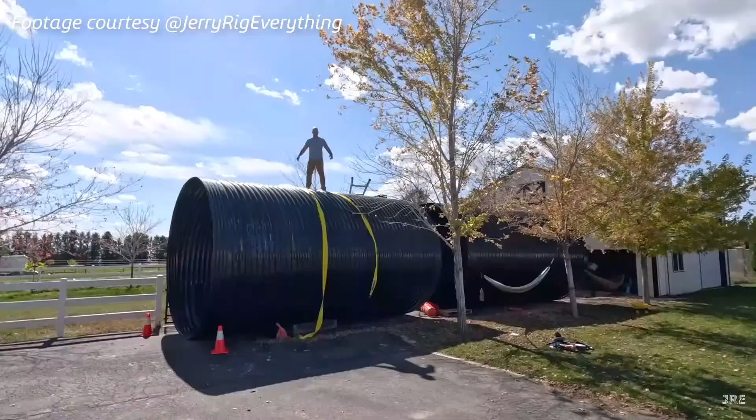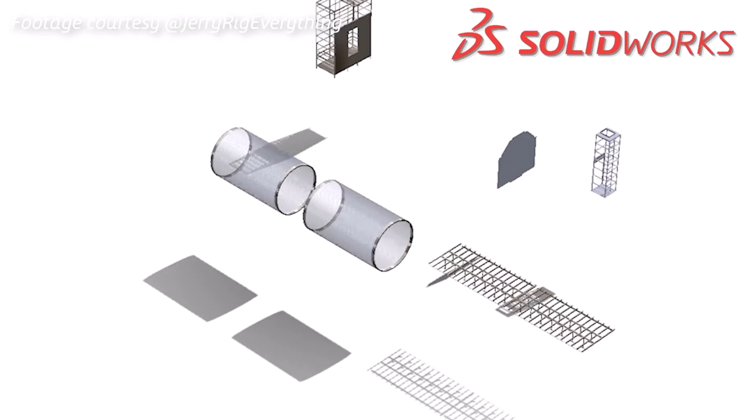I don't know if you've seen this video, Jesse. I've only seen bits and pieces of it. So this is not a single video. What you're seeing right now is Zach built an underground bunker, or at least he designed it using the Maker edition of SOLIDWORKS. If you've never seen it before, this is tubing underground, a very large set of tubing he puts underground. Apparently he said, and I'll trust his word for it, I don't know about you guys, so let us know in the chat if you've built an underground bunker.

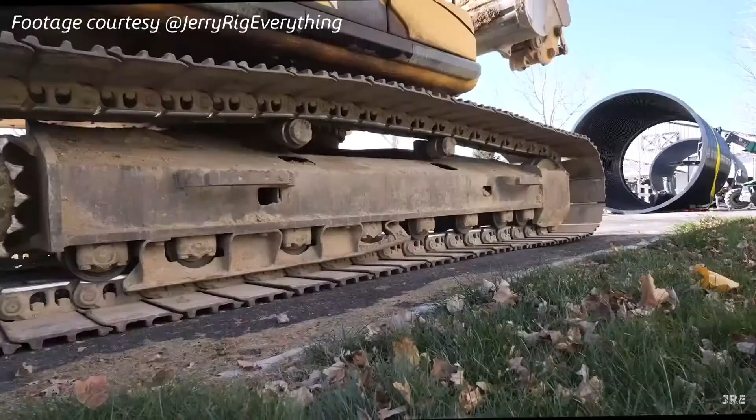Apparently, if you get 6 feet or more underground, at least where he lives, maybe below the frost line, the temperature stays around 60 degrees. So it's kind of a persistent year-round temperature. He wanted to get far enough underground for it to actually be inhabitable.

That was the first video. It's kind of crazy. There's going to be an enhancement you guys will see later where we show large displacements and how we handle those in SOLIDWORKS as of FD01. That's definitely an assembly that would apply to.

Yeah, that is an ambitious project. But it's crazy, you guys saw the explode and then it comes back together, right? Explode, collapse. It wasn't that many parts, probably 8 parts that came back together. Of course, 2 of those parts are very large.

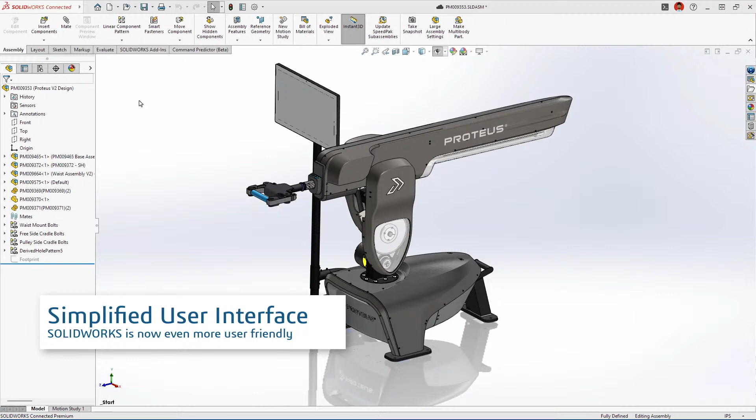This first one here is simplified user interface. What were your first thoughts when you saw this as a longtime SOLIDWORKS user? Well, at first, obviously we're really good at customizing the software, so I was like, okay, I don't really know that I see the benefit. But then when I thought about it, it makes a lot of sense.

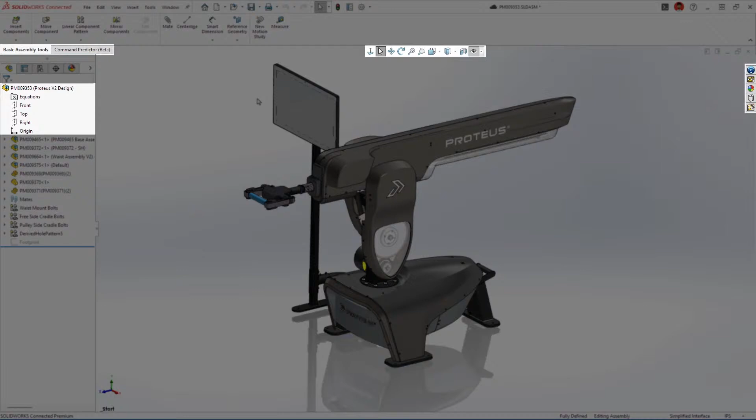I think it's one of those things where you're going to have to rely on experienced people to let younger people know about it, because they may not know. If you're brand new to it, you may not even know that it's there. Having an experienced colleague tell you about it could really help out. I think it's a cool idea.

It is neat. The first time I looked at it, I'll be honest, I usually use the S key for pretty much everything. A lot of us who work at SOLIDWORKS, a lot of you out there who've used it for years - I've taught so many training courses on SOLIDWORKS, not trying to brag - you know it's like you just press the S key.

As long as you know the term you're looking for, just start typing and you have it. Your hands are always near the keyboard. But for a lot of new users, that's really not a thing - you don't know the names of the commands if you're using a new program. To be fair, not a lot of software has search functionality like that, where you can search for functions and initiate the tool right there.

That's kind of a unique thing that we have, and I do love to work that way. But simplified interface is really cool. Coming into a CAD software, it's really easy to get totally overwhelmed if it's your first time. SOLIDWORKS is really good about interface stuff in general - it's one of the things I love most. Giving somebody a clean start, just the basics you'll need, gets them excited.

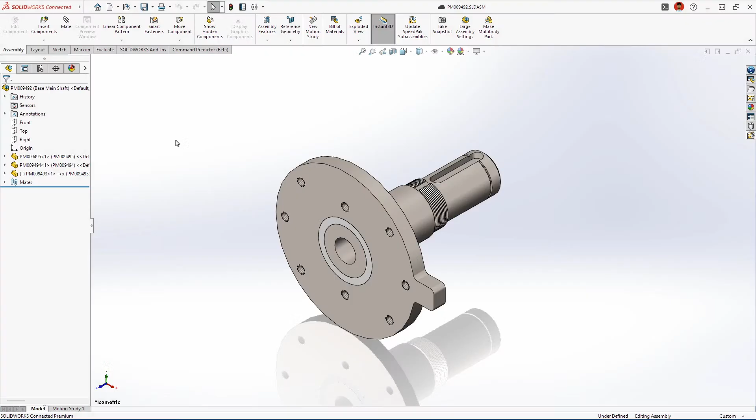All right, so let's move on to the next one here. So what do we got? Ooh, automatic drawing generation. What do you think? I think this is a crazy idea, and I can't believe that it actually works.

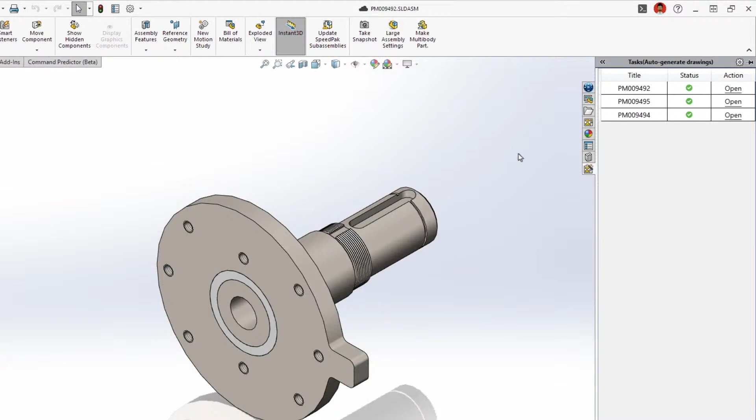Yeah, I think one thing that came to mind with this—we were talking to one of our teammates, Mike Sandy, at World, I remember, because we showcased this at World. And one thing I remember talking with people about in the corridor is that you can see it kind of makes a standard three-view drawing. You can see there's projected views and everything. Kind of reminds me of predefined views in a way.

Yeah, if you guys don't know, if you save a drawing with predefined views, you can load the model in, and the views kind of retain the set scale, whatever it is—the sheet scale or whatever the view scale is, whether it's a shaded view, shaded with edges, standard, hidden lines removed. You can almost shortcut drawings a little bit if those are the types of drawings where you're doing the same view layout time and time again. Kind of reminds me of that a little bit.

I would also say it reminds me in a way of detailing mode within drawings—these modes or features that come out where it's like, this could be useful for someone, but this is definitely not going to be the finished state of this tool. I don't know anything in that regard, but I'm thinking you probably agree, this is not going to be the end, for Phase one. Yeah, this is the initial release.

Yeah, so I love stuff like this. You and I chat about AI a lot, but I see tools like this as such a good chance to do stuff for the user that isn't adding any value, right? Let the designer add value where you add value. There's an art to creating beautiful drawings that are easy to read. All the stuff up front is not any of that. So get all the repetitious work out of the way, and then you can spend your time as the designer focusing on where you actually add value. I feel like this is a perfect example of that.

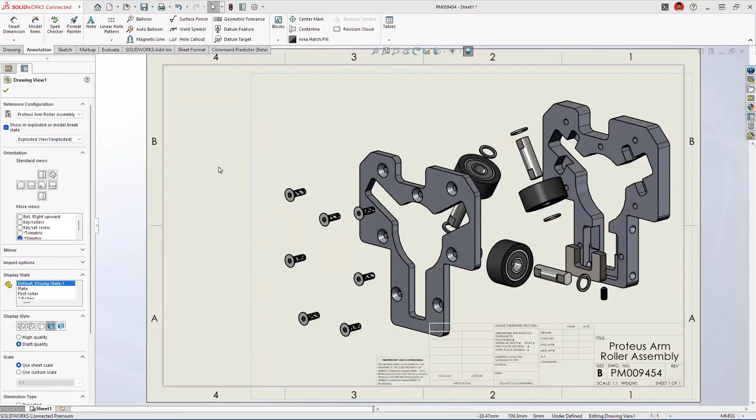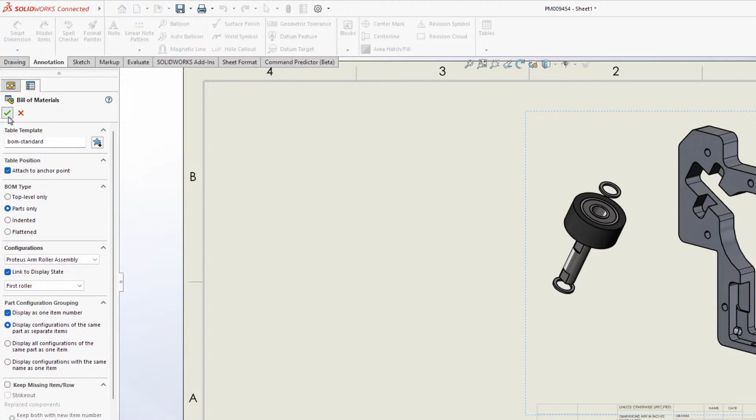All right, so this next one, display state BOM filtering. This one, I would say, as someone that has trained on SOLIDWORKS and used it for a long time, I really love this enhancement. The reason why is if you're purely making a configuration for a customized bill of materials, configurations are pretty weighty. Display states are not. So this is definitely a good tool if you're looking to do something like that.

Yeah, I agree. And I like tools like this that add value elsewhere too, because it makes a display state even more worth doing. You've got the extra benefit of using a display state in the first place, where when you bring it to a drawing, now you can take advantage of it for the BOM. I do really like that as well.

And Tracy - we had Tracy Wittig on the show, who did a great session on display states, configurations, all sorts of cool stuff, which is up on the SOLIDWORKS channel. So you should go check that out if you haven't seen it, because it's fantastic.

It's day 2. And day 2, I was just mentioning to our producer, Ian, we were in the car going to Home Depot getting some stuff for the set. Day 2 is labeled as the R&D kind of general session, the R&D themed day of the event. But it's definitely getting many more views. It's a heavy hitter. A lot of times you probably see this on other YouTube videos - you have a runway, like the first week or two, you get the most views, the most attention. But a lot of people are going back to that one.

Yeah, and it could be because of that great tech session. I would suspect so. I was there for it. So, yeah, you're like, I was front row to that.

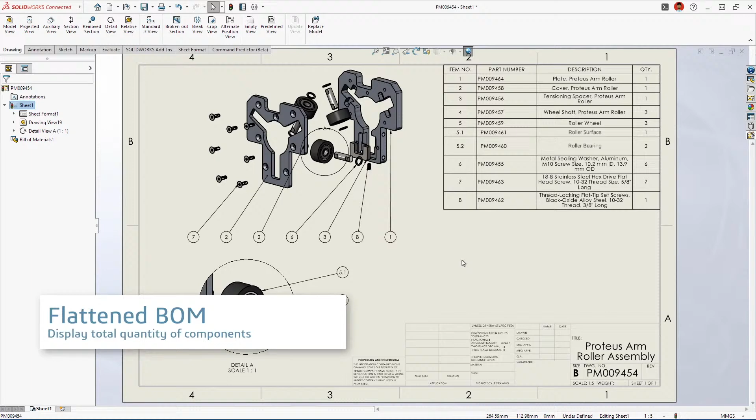This is kind of one of those tools - I feel like there are a lot of tools that fall into this category - where it's something you may have tried before or may have never used, but then by the time you get to it and you need it, it's like, yes, because it saves you so much time of having to do things manually. In the case of a BOM, if you do things manually, you break all your links, and now you've got to maintain that yourself. So I love the little things they're adding like that, that just make your life easier if you do end up needing it. Or obviously people who need it immediately will be super excited about it.

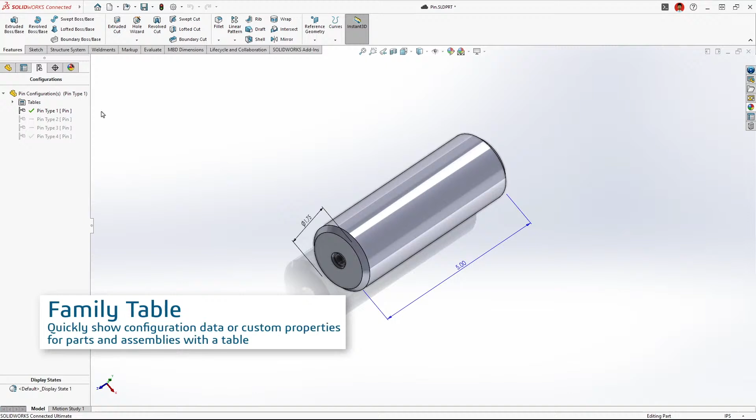One area that gets me excited too, when we first learned about these enhancements, is these sort of areas where I had processed enhancement requests for them before, from you guys, from customers. Yeah, that's definitely one of them - that one came up a lot. And another one that came up a lot is this one right here. So not directly family tables - we weren't saying, I need a family table, not by name, but like the functionality behind it.

I think a lot of you... Yeah. I feel like when we showed this at World, people were very happy about it. Yeah, I've been asked for this a bunch of times. So if you could just talk us through what exactly is happening here.

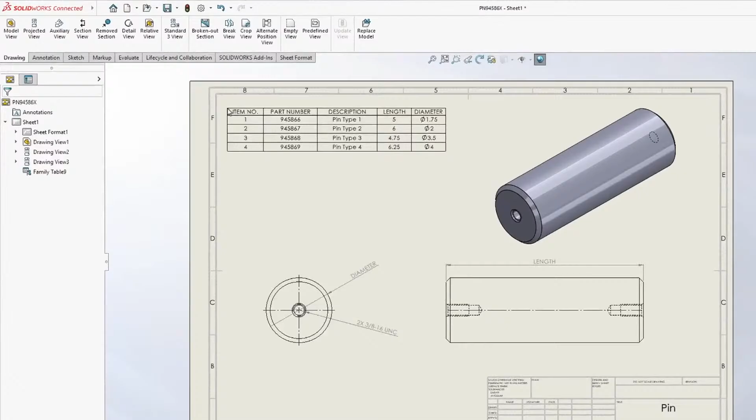Well, obviously you take advantage of configurations in SolidWorks. That's one of the main benefits with SolidWorks storing all of that data. You can store a whole bunch of different versions of the same thing in one part file, so you can extract that information all over the place. This is a new way that you can do it, and just build that table out of all the versions that you've got of this thing, all in one place. You can see it in one table, and you make it in one click essentially.

It's nice. You can see in the demo, one thing we tried to make sure to illustrate is that it shows configuration specific properties.

Really important. So now this next one is sheet metal. This is my demo, so I'm really excited to showcase this. I was really happy, so we used the Proteus data set for it. Proteus Motion, you guys probably saw them at World. Yep, we probably saw them in all of our launch materials for 2025.

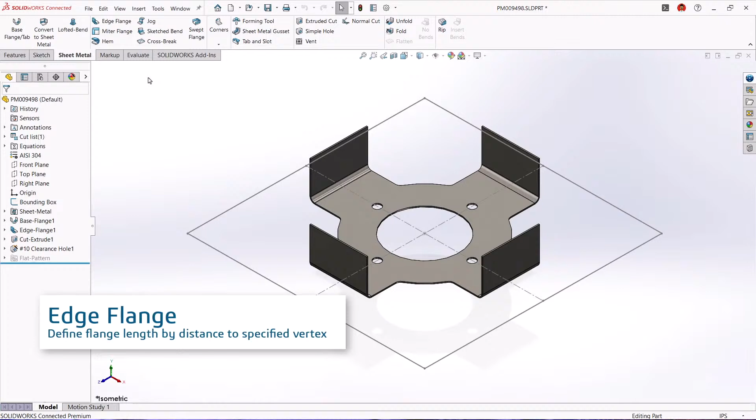So this one I took from the Proteus, and you can kind of see with this edge flange. Essentially what it's doing with edge flange now, you can have the edge flange extend distance-wise up to a specific vertex. But what you can also do is select multiple edges at the same time. So firstly I did that first selection, established a distance via a vertex, but then basically picked a bunch of other edges, and it still maintained that same parametric linkage to the initial distance.

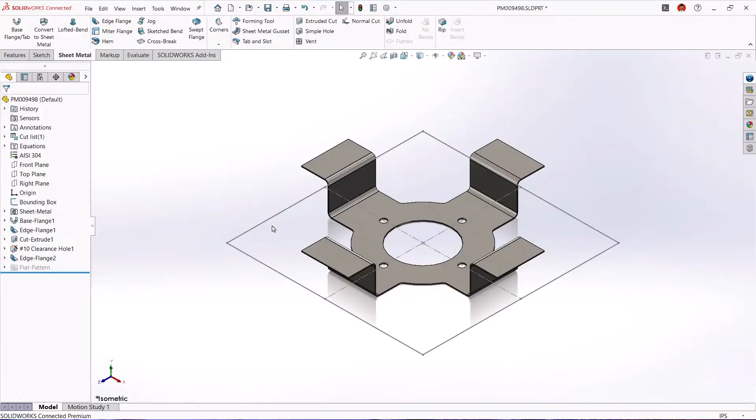Super cool, yeah, which I think is really, really nice. I would say overall, this is one of those things where I would just say look out for it. This isn't necessarily, at least as I perceive it - let us know otherwise - but this isn't one of those where I'm like, oh yeah, everyone's gonna be using this all the time. But still, it's another option you have.

Yeah, and it's a nice one, especially if you've got all of your bend information dialed in. In SolidWorks, you can get that bounding box that it needs to fit into this certain space, and you can define that super easy. And then if it ever changes, you're set. It's an end condition - it updates.

So there's another one here using the same file. This one I really like. Essentially what this is showing - and it's kind of one of those areas where in talking about the thing, even if it's just an enhancement to the thing, you're reminding people of it, and that's what I appreciate - namely, an enhancement to library features.

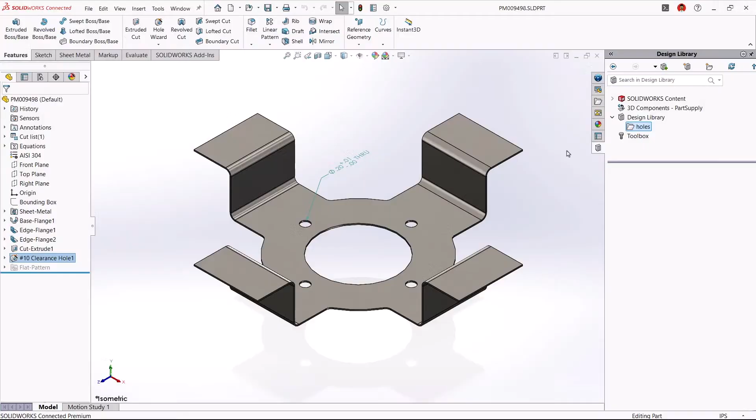So library features, for those of you who don't know, essentially what you're doing is cataloging or making a library of different features. You can drag and drop, say, cuts or bosses. Forming tools are another form of what I would say are library features for sheet metal. You're kind of drag and dropping them into your part file, and it's taking the dimensions, it's taking the relations, and it's adding them to that new part file. So you're not having to redefine it, or if it's a specific hole pattern, you're not having to open yourself up to error.

So I really like that we're kind of reinforcing library features as a whole by talking about this. The enhancement, however, in FD01 is that if you're doing any sort of model-based definition, if you add DimXpert dimensions - which is pretty much our name for model-based definition dimensions, wow, that was a lot to say - it's the ability to basically store those.

So as you're seeing us play it back, essentially what it is, when you add that library feature in, it's just a checkbox. You can say include MBD dimensions, like I show here. And when you drag and drop it back in, that definition will be back in, which is kind of cool, because in this example I showed a very simple bilateral tolerance, and you can also see the hole size. So yeah, that's nice - time saver on top of a time saver.

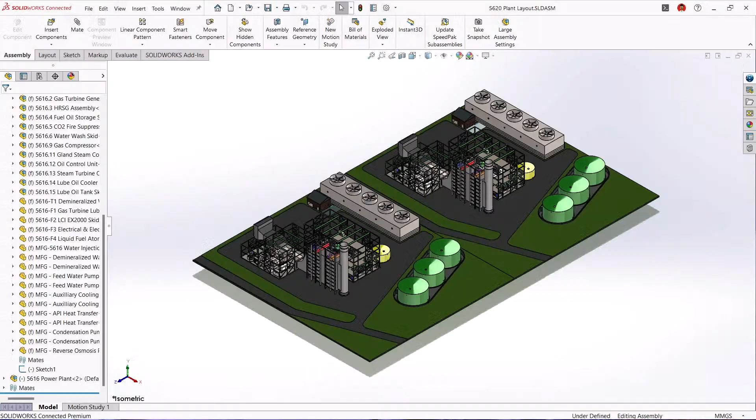This one I was talking about the bunker earlier. These are power plants. But I don't know, it's interesting.

When I was making this, it was almost hard for me to get this to happen because I'm very slow with everything. I wasn't gonna say anything. My friends make fun of me all the time, I'm very slow, I'm very deliberate. I don't make a lot of mistakes, but I'm not gonna win any race. Yeah, much more erratic, I'm flailing all over the place. So maybe this will come in handy for me. This wasn't a good one for me to spend time trying on.

But I have heard of people where the model flies out in space. Essentially, as you're saying, it's pretty obvious. This isn't one that's hard to demonstrate, but if you're kind of jerky with the mouse, it does some thinking in the background where it's saying, okay, proportionate to the way the person moved the mouse. I don't know what the algorithm is, you'd have to ask a developer, but proportionate to the speed and jerkiness of the mouse movement - is that a term? I don't know, it is now.

It'll give you a little message. I feel like normally when this happens - and I don't have it happen a lot - I sense I have it constrained maybe in a plane, where you've dragged it and it's already constrained in 3D space, but you're dragging in a different direction and suddenly it goes somewhere you don't expect. Yeah, that's exactly it.

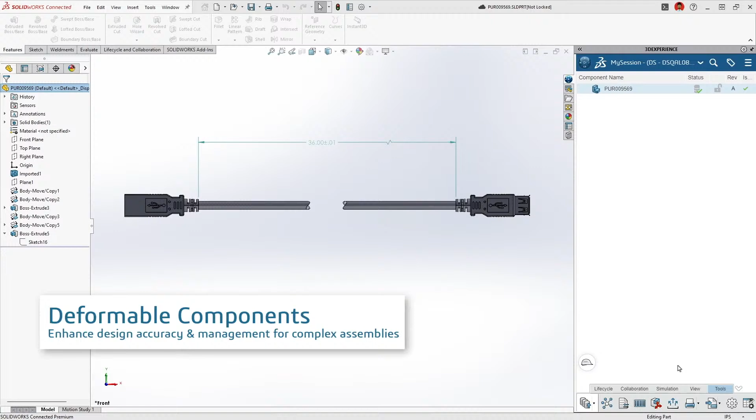I'm so ready. This is a kind of a trippy enhancement: deformable components. This took me quite a while to figure out what was even going on here, and I'm still not totally convinced that I understand it, but I think I've got it now. Well, that's why this is a podcast. Definitely edit that part out.

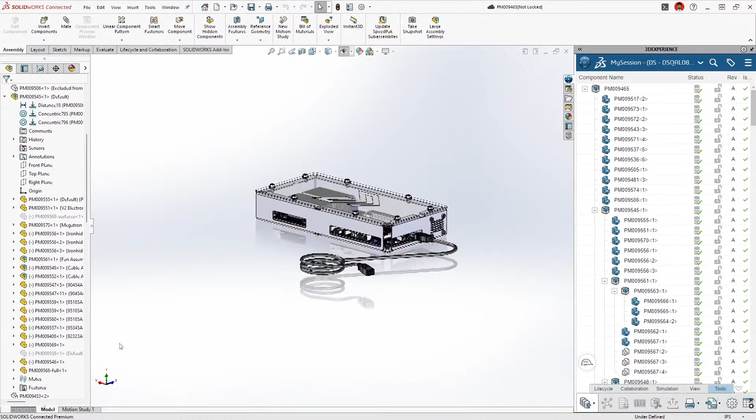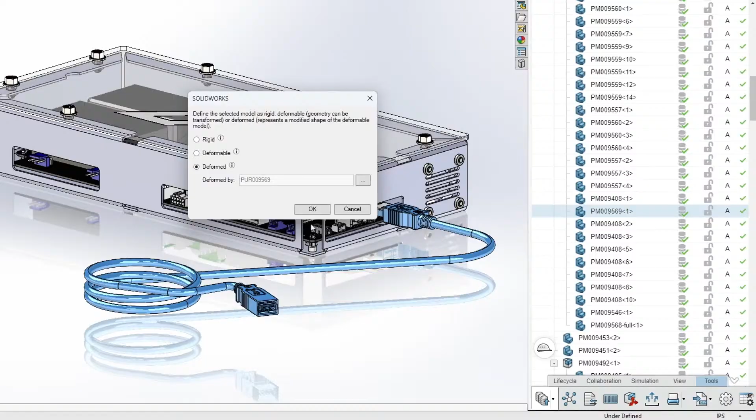No, it's actually - so what we're seeing right now is we're within SOLIDWORKS, but we're also seeing the add-in for the platform. So deformable components, essentially, and what we're seeing in this example is a USB cable within the Proteus. So you can give different representations of the same component, almost like configurations in a way, but the components can be massively simplified.

Yeah, so you think of them like in drawings. What's the name of the - like when you have the broken view? Oh man, yeah, Jim, kill me. Break view, yeah. I was thinking zigzag, like the zigzags we saw at the beginning there, the break view that was there. Yeah, break view, that's what it is. I was like, it's not broken.

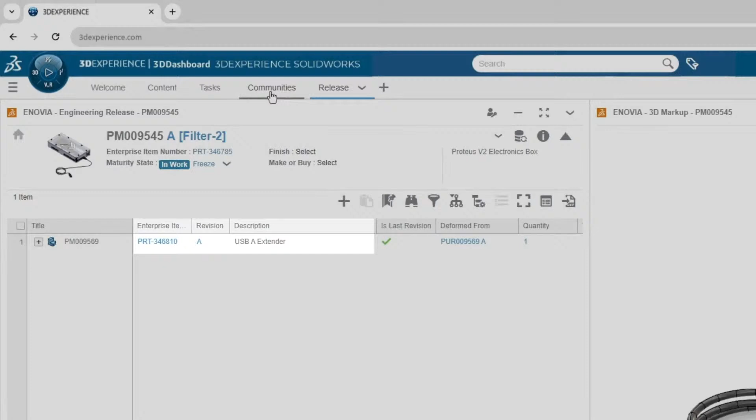Yeah, so break view. And within the platform, these are actually connected - these two different components, these two different representations. Yeah, so you've got physically two different geometry because you've got a component that can be messed around with, right? It's not always the same as a cord, right? It could be all different shapes. You might need to represent it in its shape or in its simplified state, but in reality they're the same EIN number, and that needs to be accounted for somewhere, right? And that's what we're doing here.

That also would not be something that would be like within a configuration. Right, if you're doing some sort of cabling or a power cord or something like that.

That's not necessarily something within a configuration that you're going to be able to, or would want to, have sort of straightened out. Which I suppose is important in terms of wire length, like if you're actually doing cabling or wiring, or routing. We have SOLIDWORKS routing, so you can use that.

So digital paper trail, am I right in saying that? I think so, well that's the long and the short of it. I feel like that was no pun intended. I think that pun was intended. Yeah, I just wanted to see what you would do.

Okay, so next one. Streamline design creation. Sounds pretty grand.

Those of you who have used SOLIDWORKS PDM, I know many of you are out there, are probably familiar with the functionality where, for those of us not using SOLIDWORKS PDM, we go to File, New, and we have our part template, assembly template, drawing template. But really you're just making something new, and then you're in modeling space or sheet space for a drawing. Within SOLIDWORKS PDM, if you're using the platform and storing your stuff on the cloud, it can ask you other questions that connect to properties.

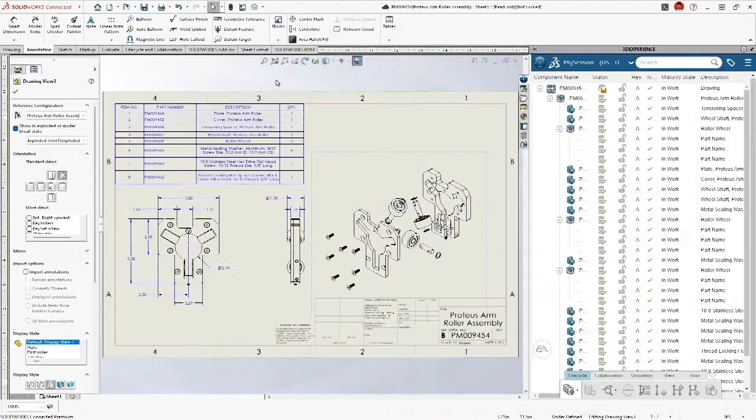All right, so this next one here, what do we got? Design iterations, this is a big one. This is an interesting one, and it's been available kind of early access, so some people may have played with it a little bit.

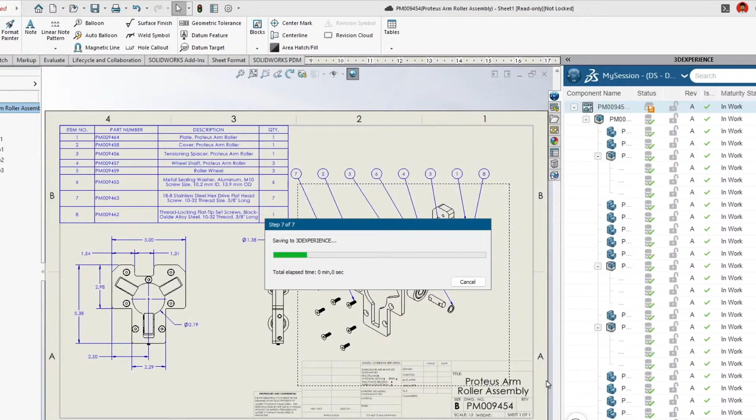It's kind of interesting because you think of revisions or something, but not everything needs to be handled by a full revision, or you don't want to track all of those things, right? So these are kind of a micro version of that where it's almost like a save point - you can set those revisions. Even cooler, we were testing it, that goes with the file, so you send it to somebody else and they can read those iterations and go back to that save point. You can see those available and just kind of step it back.

I can see myself using that because sometimes there are things that I might want to just try or test that I don't necessarily want to commit to a revision, but you want to build in that step back point, and that's a great way to do it.

Yeah, it is. It's somewhat reminiscent, again this is all data management in the simplest form of saying it. It kind of reminds me of the way PDM has versions, but in terms of nomenclature and general visibility within the interface, it feels a little less committal. Yeah, it is kind of simplified from that.

But if you're not using any sort of PDM, whether it's on-premise or cloud, whatever, it's definitely way better than just saving out different copies of files. Yeah, just all within a container, within that object.

This is definitely one of my favorite features of SOLIDWORKS that we've now brought to the platform, being able to reload from the server. I don't know about you guys, but whenever I'm using software that does not have file reload in some way, I feel like it's kind of missing.

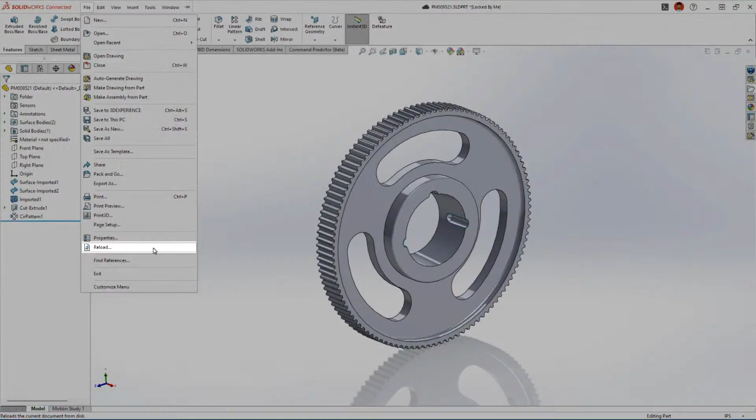Yeah, it's like an instant enhancement request - reload from server. So obviously reload from server has been there, it's just kind of combined in the interface in this case. But that's something I maybe missed the convenience of having in the same way as the iterations.

I will often rely on that. I'll go down some crazy modeling path, knowing that I can say, nope, don't like it, reload from server, and boink, I'm right back to where I started from. So it's kind of nice having that fallback point - I can save it to the cloud, reload from server, and get right back where I was. I kind of use that as a tool.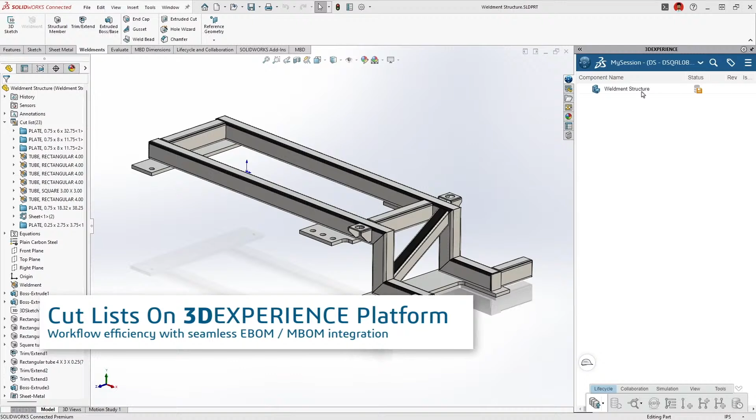You never make any mistakes. We're kidding. Yeah. All right, so this next one, cut lists. Gotta say that really slowly, I always wind up jumbling that. Yeah, those two words together, cut lists.

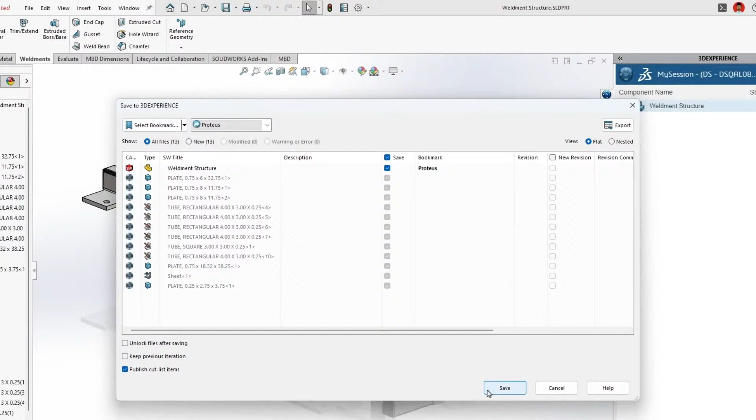So cut lists, being able to upload them to the platform, is convenient for a number of reasons. I think for basically every customer in this instance that we've showcased for what's new, they're using the platform lately, at least in some capacity. This is very convenient because you're actually able to see the cut lists even if you're not in SOLIDWORKS or using it ever. So you can push all that information right up - the more information you can get there, the better.

So if you're using weldments, you have a cut list. If you save to 3DEXPERIENCE, it's just a checkbox. So look out for that one there.

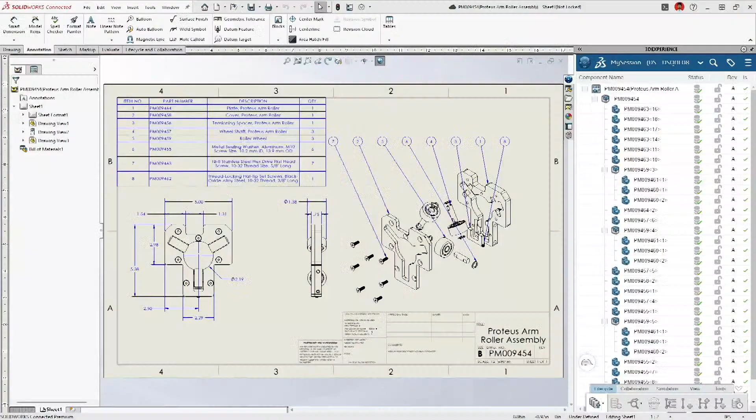Okay, so next one, change action stamping. Once again, one that I think PDM users are fairly used to. Once again, we're kind of porting it over to the platform. Can you talk to us a little bit about what this does?

I love this one because change action is something that I can see being a huge benefit on the platform side, because it might be done by somebody who has remote access or something like that. So we've got the ability to have this tied right back to the drawing - when that change action actually happens, it will then stamp the drawing with that information and push that information back from the platform right onto the drawing.

And I love that because it's a perfect use case for the platform interacting back with SOLIDWORKS, because someone doing the change action may be working from some platform view right from their workstation or even from a mobile like that showed there. As they do that, that's actually marking the CAD information wherever it is, right on the user's desktop - they see that built in right away, which is cool.

I love that. It makes me think too - we haven't really done anything on live design or SolidWorks Live with title blocks in a while. True. That's like another thing, keep thinking about, the title block builder tool that was built in is totally overlooked. Oh man, I remember that. Yeah, let us know if you used that before.

That's just having good content on how to make title blocks. Of course, we have training content for that. But that's one that could definitely stand to be refreshed. It's a great use case of having that set up correctly and ready to go, because that'll save you a ton of time. Just auto-dropping information into your title block is always a good time saver.

You remember this? Which year? Don't look at the bottom left. Gosh, I don't know. Okay, so this is SolidWorks 2017. I didn't even have it on the top of my head, I should have said it because I would have been close. So we're looking at, this one is one I picked.

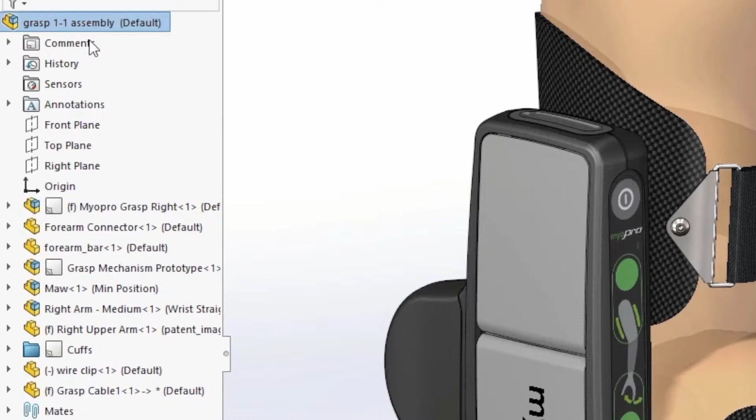We're looking at comment indicators, which I still think comments are massively underutilized within the software. The biggest thing I remember when talking to customers and users is that it wasn't really easy to know at all if someone had made a comment. We had a tooltip, but who's hovering over features looking for comments? That's insane. So what this did is it added a little post-it logo within the feature if you have it turned on within the part assembly, and it shows you if a comment has been made.

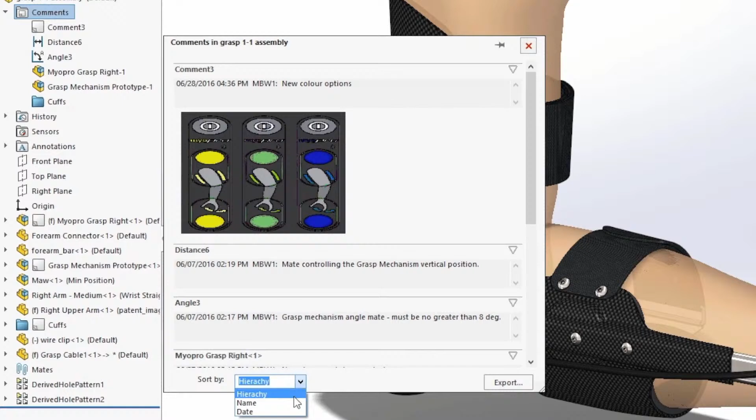This was also around the release where they added the ability to add images in the comments, maybe within a year or two. Nonetheless, you can definitely do it now if you're exploring comments. The other thing I wanted to mention is that comments overall look very different today. This is dated, this is a real flashback, a real retro clip.

It's funny you say that, because I was looking at that saying I don't even remember them looking like that. Now you can format the typeface, you can do bold, italicized, underlined. You can also add categories, I think in the system options it's like high priority, medium priority, low priority. There might be others that are labeled, but you have 5 different color coding options. So you have a lot of different things you could play with there.

I know we're adding all this stuff to the platform and PDM, but still there's something to be said for actually being able to annotate in the model.

Honestly, I use it for myself, even if I'm not sharing with someone. I'll leave myself notes sometimes because if it's a complex model that I know I'm going to have to go back and make a change for, I'll just leave myself a note like, this is what I did here, so I remember when I get back to it. Do you put like, Jesse, I love you? Yeah, I do sometimes, it's good self-talk. Says the self-talk. Yeah, all right.

So that was the feature flashback of the day. All right, so let's get back to some new stuff. I like that. Jesse, you and I worked together on this a little bit.

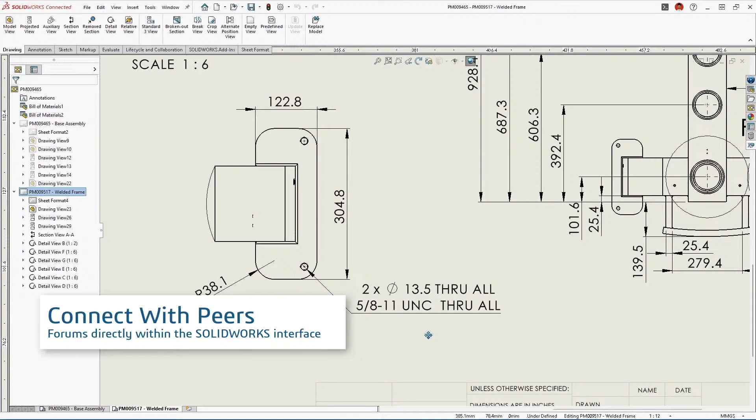So this new enhancement, connect with your peers inside SolidWorks. So what does that even mean? Really cool, so the forums are right in your pane now, just a click away, which is really cool. This is one of those changes, obviously the forums got moved a number of years ago, and now they're totally integrated right within your SolidWorks experience.

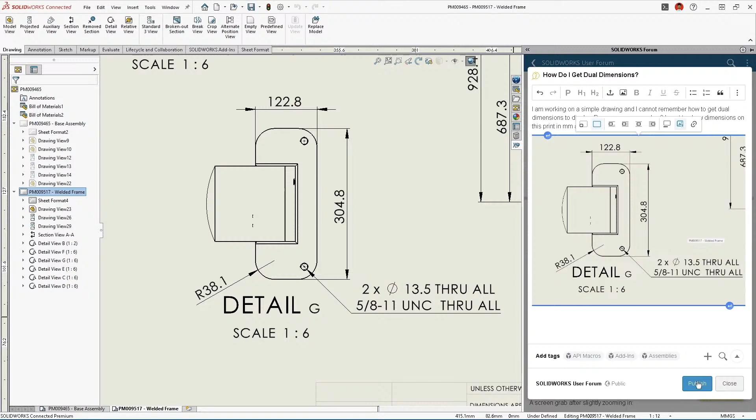So you can see in the demo, just take a screenshot. How do I do something, right? You can share the screenshot, share a model.

Super convenient. Obviously, one of the best parts of SolidWorks is the user community, right? Hanging out, we just got back from World, saw most of you. So that interaction is one of the key benefits in my mind, at least, of using SolidWorks.

Quick access - you can just drop right while you're designing, over into your pane and interact in the forums, get a question answered, answer some questions. It's cool, I like it. I really like it - if you're listening, I definitely recommend looking at the demo that Jesse made for this.

So that was one of the things that you and I were talking about - what's an ideal sort of workflow? So you might be thinking, why would I want to go on forums if I'm using a CAD program? Why do I want to interrupt my workflow?

The convenience is that you can be right there within the interface, take a screenshot if you're having a problem. You can upload models, you can upload images if you wanted to. Just hit the Windows key, snipping tool - we all have it. Grab a screenshot, paste it right in there, right in the task pane, pops right out. And you have access right there.

So you can get answers to your questions, which I think is a really, really nice enhancement. And there's a dual benefit - obviously you can go searching around on the web to try to find an answer too, but when you're posting it up on the forum, somebody else who needs to know will come across it as well. You can search in there too, and see if you can find it, and all that information will continue to get more and more accessible.

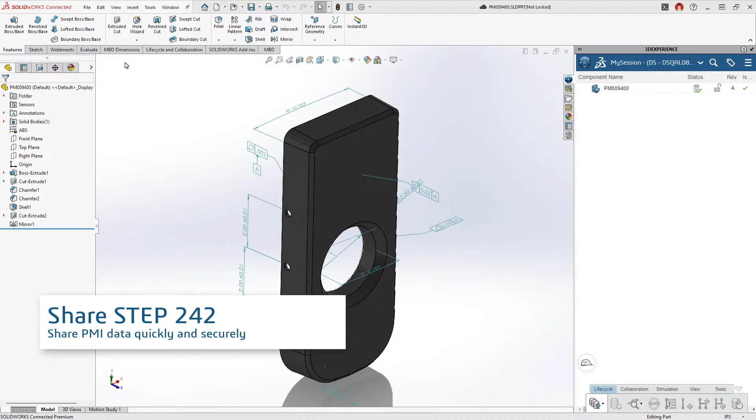So sharing STEP files, STEP 242 - you can share it with annotations. Now this share dialog, I wanted to talk a bit about as well. This might not be familiar to a lot of SOLIDWORKS users, right? So you made this demo - could you talk to us a little bit about this one?

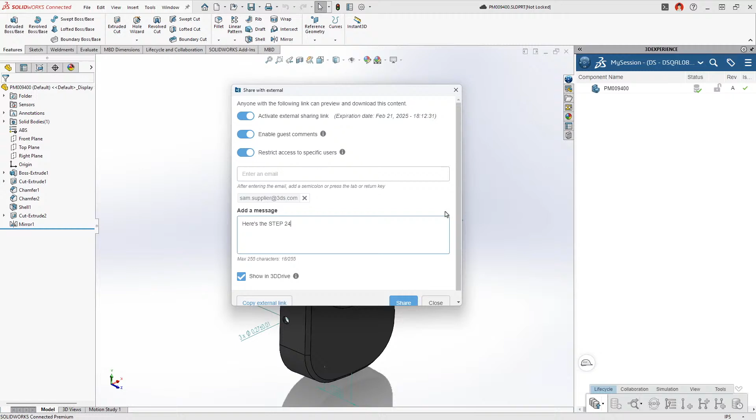Yeah, so the option we're talking about here, the sharing of the 242, is not new, right? You can share a 242 and you can save out your PMI. You were talking about building them in, maybe you put your dimensions in with your drag and drop there, and now you can export them. That format can carry all of that additional information with it.

But the enhancement here is really just that share is now consolidated. So you'll see a share in every version of SOLIDWORKS, regardless of which you're using. It's really just an interface cleanup, which is nice. I always love when, like I said before, SOLIDWORKS has a great interface and they're constantly focusing on that - cleaning things up, moving things to consistent locations, so the tools you're looking for are where you expect them to be. That's exactly what's going on here.

So the move option is moved into the share dialog, and the share dialog itself has been added in where it wasn't. So you've got now this option available right from within the share, which is exactly where it should be. Welcome home.

Sharing the PMI information is interesting, and we show in that switch up there where this sort of made-up persona we have here, Sam Supplier, is looking at the part. The one thing I did want to mention, because it's not really relevant to the demo of the new feature, is that it isn't just sharing the information that you look at on a web page - this is also a way to just download it.

And you have more control - you can pull it back if you'd like to, say you don't want to have it accessible. It's all locked and protected, but let's say you just wanted to take it offline, you had a new version or something like that - you could upload or update the version.

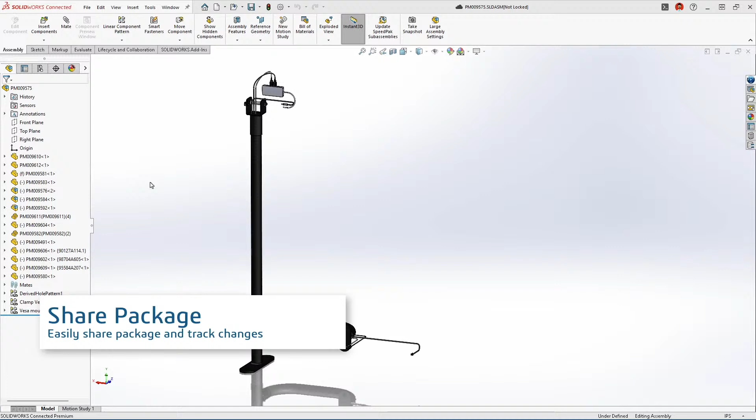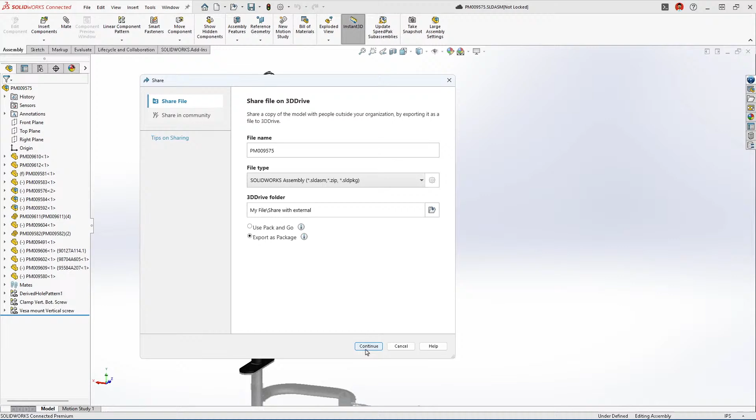All right, so this is the last one of the day: share package. It's like a care package. So for platform users who are sharing data out with somebody and want to get it back again and still integrate it into their platform data, that package is like a pack and go for platform data. So you've got those two different options, and obviously a pack and go is a pack and go as we've always known it.

The package, as you can see, you can tune this and set it up. So somebody using another desktop SOLIDWORKS can get that package, install a little reader for it, track that information for you, ship it right back to you, and you can read it right back in, which is pretty cool. That option is moved right into the share dialog, so the share is packed with all the stuff you would really need at this point.

And it has awareness of the version information, so they can share back or export it back. You can download it right from the SolidWorks webpage. There's a little utility you can use alongside it and track all that information right in your pane, then ship it back. You can control what they can edit, what they can't edit, and then send it right back to you.

That's another area where, even for me, there are so many resources out there, whether it's training or different utilities, that it's almost hard to keep track of. There's just stuff out there that we make, but there's so many different use cases and ways to get information. That's another one that's great to know - as a platform user, you'd be informing the person you're sending to that they have access to it.